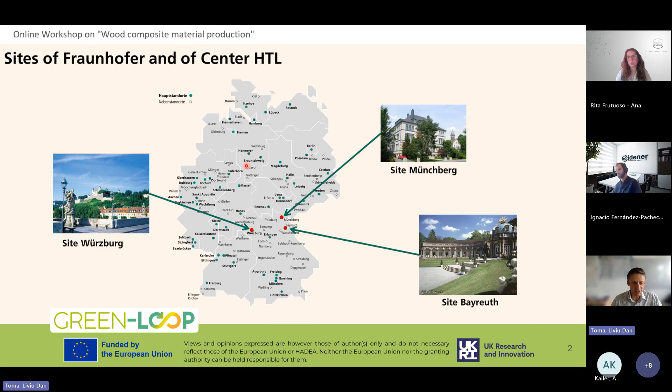Fraunhofer generally is spread all over Germany, and I'm quite sure Andreas will also have a slide about this, so I will go further, giving a little more detail about ourselves here in Bayreuth.

You can see here our main building, and on this side we have the fiber pilot plant, which also belongs to us. We have a technical area in Bayreuth that's around 3,200 square meters. Additionally, in Münchberg, 1,000 square meters, and in Würzburg a little less, so 500 square meters.

So our mission as Fraunhofer Center HTL is to design energy efficient heating processes and to contribute to the sustainable technological progress of society. We have a very big group working on developing high temperature materials, high temperature components, as well as high temperature measuring methods, all focused on optimizing thermal processes.

This is just a general remark for Fraunhofer, not only for us but also for Andreas: the primary goal of Fraunhofer is to implement new developments in industry.

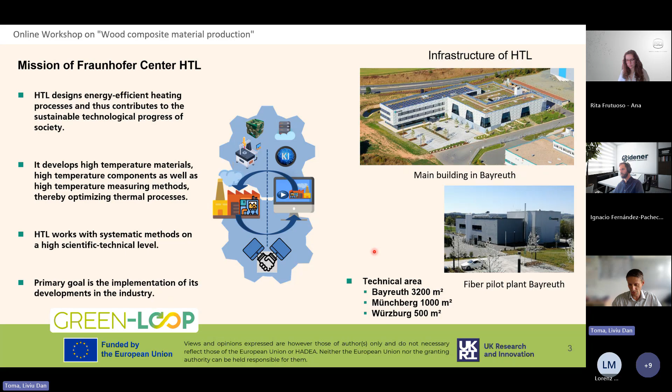Now coming back to our subject, today I will talk about results and how we got these results in the framework of the EU project Green Loop. The Green Loop consortium is built by many partners.

I know these slides will probably be made available afterward, so you can have a look at these sites and get more information.

What is basically Green Loop? In the Green Loop project, we follow three routes. One route is wood composite bearings for the tool and appliance sector, which I will talk about more in detail.

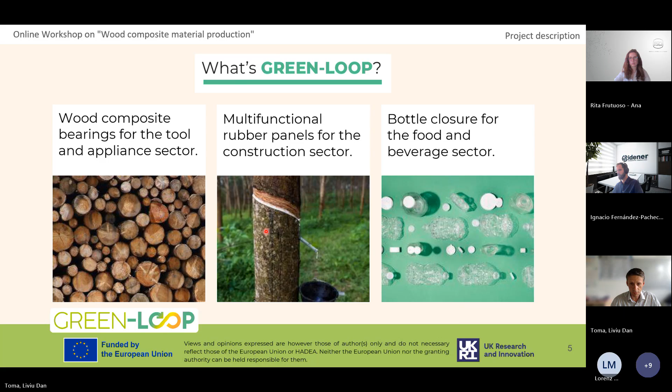The work in the project was divided into many work packages. We at Fraunhofer were mainly involved in work package 5, which is wood composites material production.

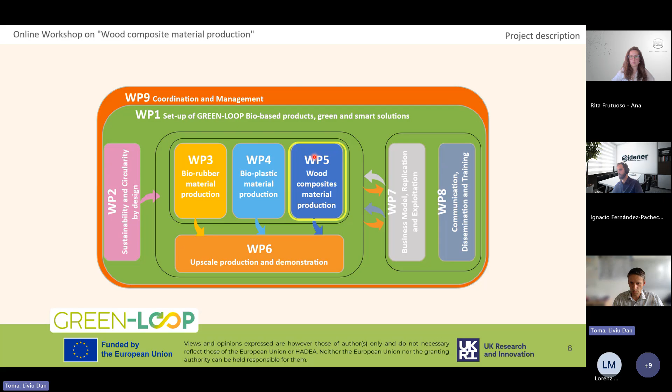How did it all start? It started almost 3 years ago when the kickoff meeting took place, and in that meeting we set some values for the composites which we wanted to produce and how we wanted to produce them.

So we decided that our raw materials should be bio-based, especially wood fibers or particles. We wanted to use biopolymers, and we also knew at that time that we would need fillers to add some special properties to the wood composites.

Also, an important part of the project was to follow the recyclability of the products, therefore also with the main aim to reduce maintenance cost, and also to use some of the inherent advantages of these biomaterials over conventional materials.

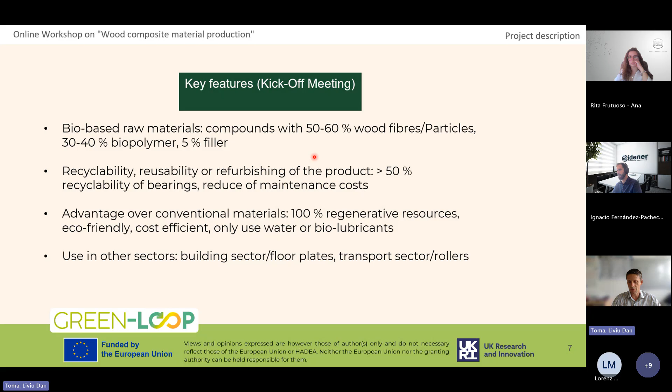Indeed, we concentrated on only some special sectors or industries, but we also see great potential for the composites to be used in other industrial sectors, like the building sector, floor plates, transport sector with rollers, and so on.

So more detailed about this: we decided at that time that we would concentrate on wood composite bearings to be applied in the tool industry, like injection molded units.

So we wanted to produce samples such as rings, cylinders, and half shells. Our partner Guala, at that time the name was Labrenta, provided us with prototype features and design.

The aim for the end of the project was to produce such wood composite in a small series. This is a very new thing for such wood composites because this should be used as a precision engineered mechanical component, which till now is still not really something available on the market. So that's about the beginning and how we started.

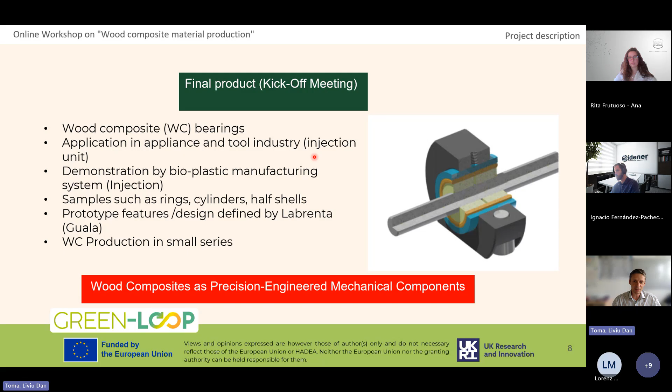A few words about the history of wood composites. Some may know, some may not, but these composites are quite old. They were used even back in ancient Egypt for making ships. But they emerged in the 20th century as cost-effective alternatives for wood materials, like particle boards or MDF.

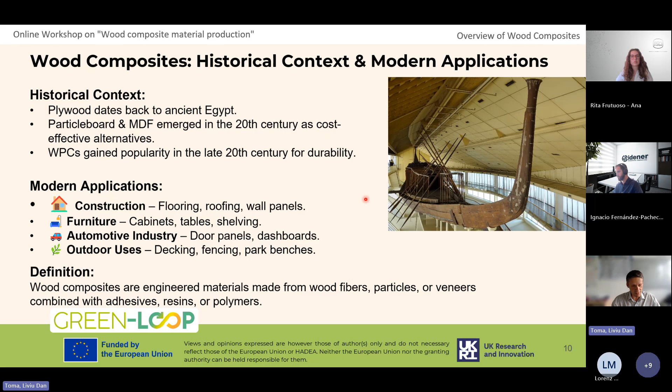Of course, we can use these wood composites to replace some other technical materials, but we have to agree that it's not always possible to replace solid wood, plastic, or metals with a wood composite. Nevertheless, the area of using it is quite large.

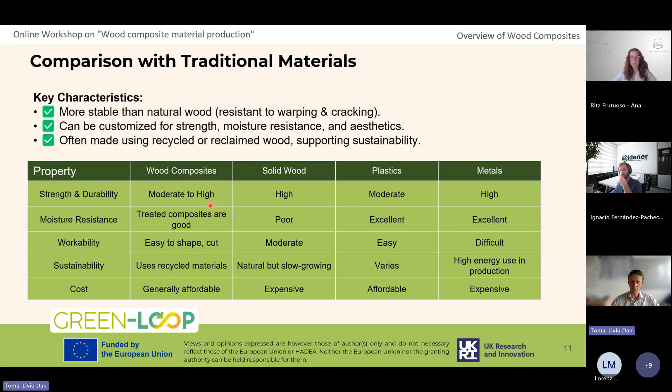Knowing all this about wood composites, we had to come up with a solution for making our wood composite bearings. For this we had to define a recipe for the wood composites. The key components of wood composites are, as I said, wood fibers, binding agents, and additives.

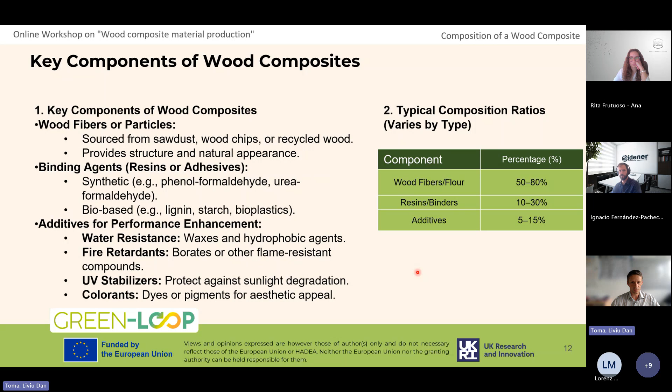And here in the table, more or less the percentage of how they should be mixed. So we went on the road to look for the best components to use, and we started with looking for the wood fibers or flours, which should come from renewable resources, like from managed forests and fast-growing species. And of course, if they come from this, they should also be biodegradable.

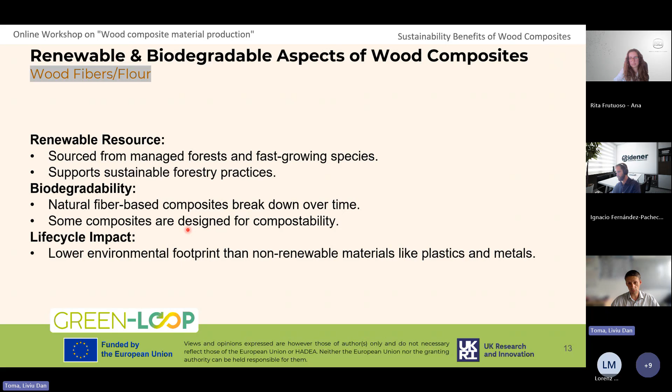We were also looking at the life cycle impact, and for this we found a very good partner for us, which did supply us with a lot of wood fibers and flours, and that is the firm JRS here in Germany.

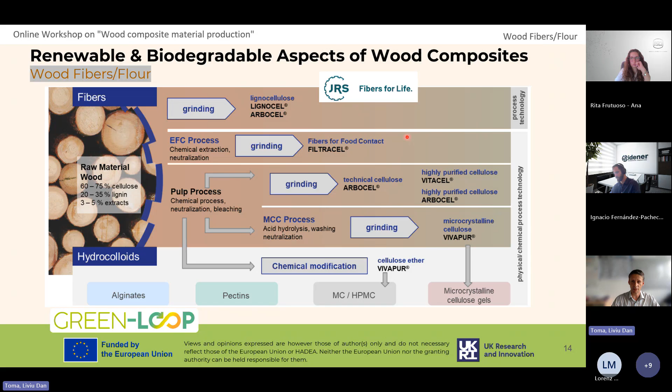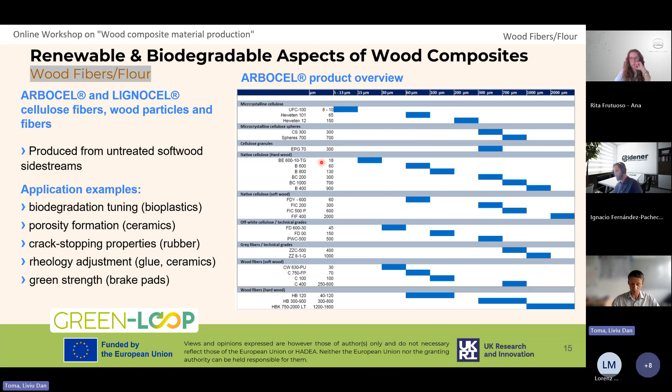This is just an overview of products which are supplied by JRS, and regarding especially the fibers, cellulose fiber or wood particles and fibers, we had quite a long list of options here. So from this list, we indeed tried some of the options in the composites.

Just as an example, two SEM pictures of composites which were made with ARBOCEL cellulose fibers and wood fibers, and you can see very clearly the difference in size and morphology here in these gray areas. This is the cellulose fiber with a small size, and on the right side you have the big wood fibers where you can even see the structure of the wood cells inside the composite.

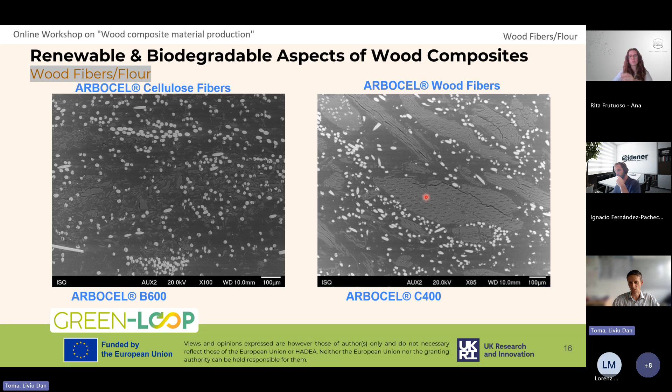Furthermore, we had to decide about the resin we would use for making the wood composite. The choice was very big, and we looked basically for bio-based polymers. It's also very difficult to find the special polymer we are looking for, mainly because there's a lot of variety, and also the biopolymers are categorized in different categories.

There are three major categories of bioplastic. One is biosourced, which is obtained from renewable resources and biodegradable materials. A second category is materials made using fossil fuels, oil, and biodegradable resources. And third, biosourced and sustainable materials that are non-biodegradable.

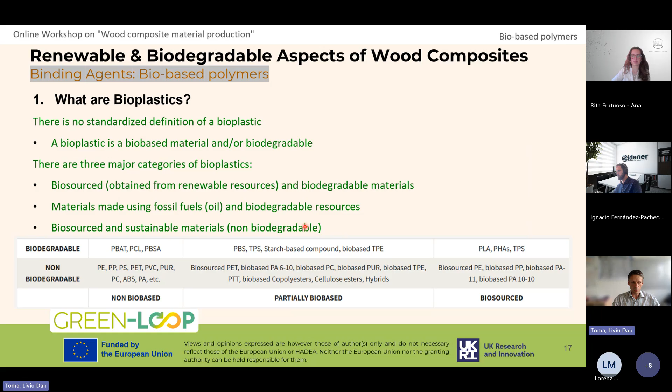Not only the materials from which the biopolymers are made is important, but also the chemical structure is important. So here in this table is just a list of the classical polymers and biopolymers which can be used for such wood composites.

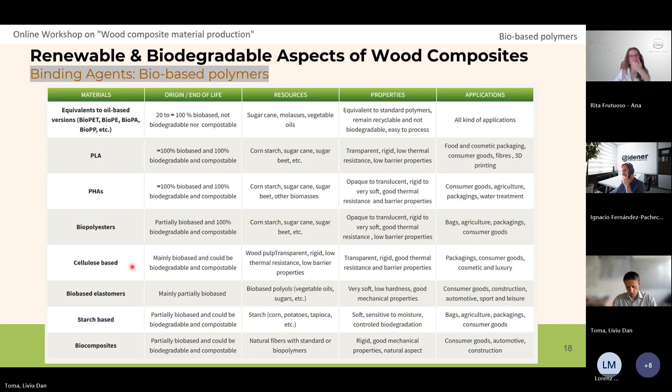For combining the wood composites and the wood fibers, a third category also comes into play: additives or fillers. This can be plasticizers, which is an additive to improve the dispersion of filler material in the matrix and prevent aggregation of filler material together. This also has an influence on the ductility of the material.

Some of the plasticizers usually used, which are shown in the literature, are polyethylene glycol, glycerol, or tributyl citrate. There are many important factors to take into account, like the proportion, how you disperse, and also the fiber surface treatment is important. Here we can have two types of surface treatment: physical treatment and chemical treatment.

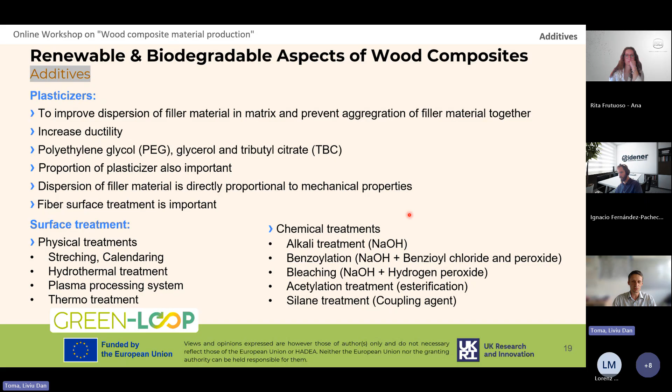As you can see, it's not trivial to make such wood composites. Therefore, we decided to make our life a little bit easier and use an already available biocomposite on the market, and further improve this biocomposite by adding fillers and additives. So at the beginning of the project, we started with some biocomposites supplied by Stora Enso.

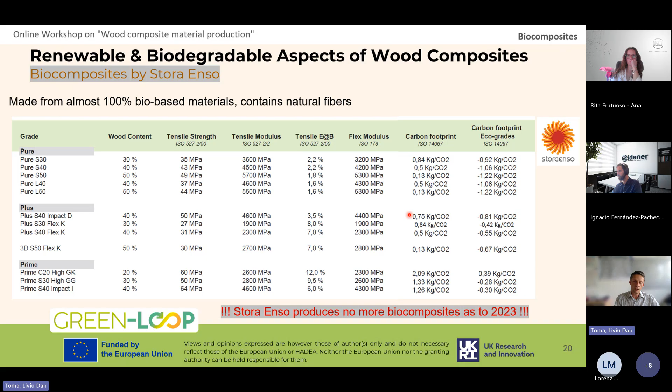These gave quite good results. But on the way, we found out that Stora Enso was not anymore producing these biocomposites, so we had to look for alternatives. One of these alternatives we found in the form of ARBOBLEND products, which were supplied by Tecnaro.

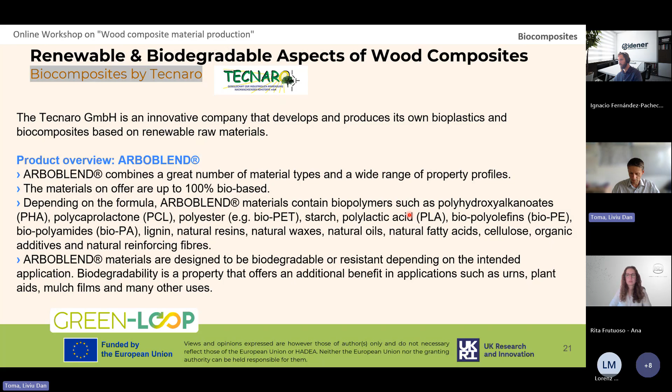This is a material which is up to 100% bio-based and contains biopolymers like PHA, PCL, PET, PLA, and so on, and also already includes in the formulation lignin, natural resins, and so on. With this, we continued our work.

We prepared three batches of materials, based first on Stora Enso and later on the Tecnaro biocomposites. We added wood fibers from JRS and fillers and additives like recycled glass fibers, supplied by the firm STW here in Germany, or lignin from Lignostar.

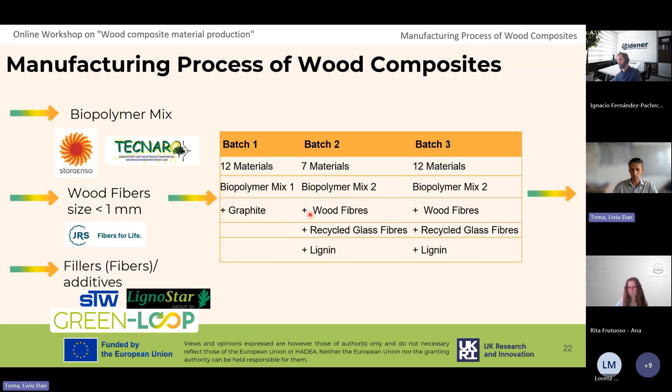So this is an overview of the wood composite mixtures and how we prepared them. Basically, we chose to compound the mixtures in an Eirich mixer. Then we performed the extrusion using a classical extrusion unit where the barrel is electrically heated, or using microwave-supported heating.

I'll say a few more words about this in the next slides. The mixtures obtained through the extrusion process were cut, and then with press molding we got test samples in the form of plates, which were further characterized and machined into special samples.

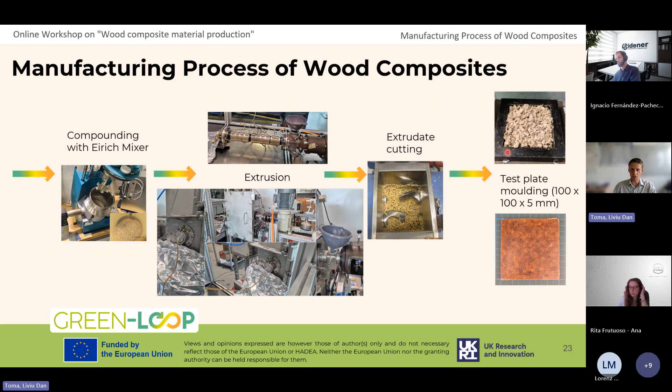For the typological characterization, as I said, a big part of the work was done with our colleagues in Idener to integrate a microwave heating system into the extrusion unit. Here is an overview of the unit. You have here the microwave cavity.

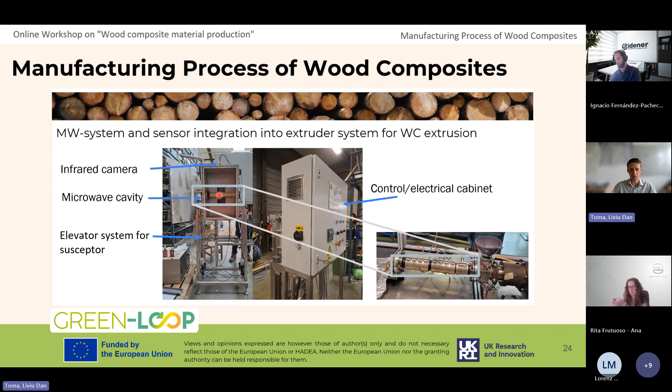We have an infrared camera to oversee the heating process. We have the control, or electrical cabinet, and here inside is the barrel for the extrusion. On this side, you can see the barrel with the electrical heating, and as in the picture, you can notice that it's not the same.

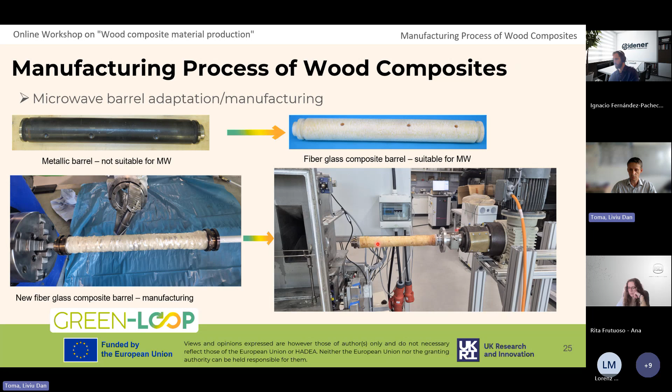This is true: the metallic barrel, which is used in normal extrusion, is not suitable for the microwave. So for that, we had to develop a new type of barrel made of fiberglass composite. Here in the picture is the first version, and along the way in the project we decided to improve this design. Here is the new fiberglass composite barrel during manufacturing using filament winding. And on the right side, you can see the new barrel attached to the extrusion unit, but still outside the microwave cavity.

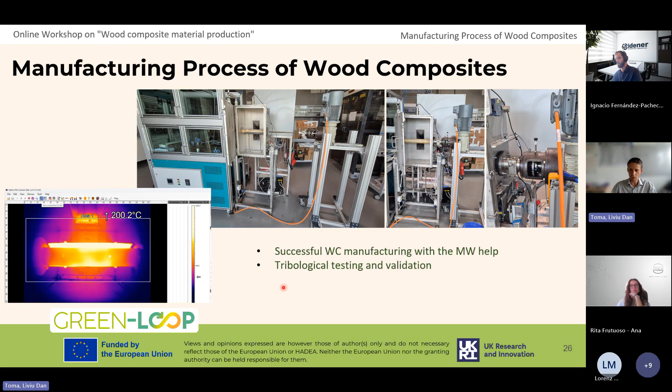I think Andreas will show more pictures about these materials. Nevertheless, we were very diligent, and we also took a lot of time to check the energy consumption.

For this, we had help from our partners in the consortium, IRIS, which provided us with special units to check the energy consumption, and the preliminary results show us unfortunately not such a big energy saving comparing conventional heating extrusion and the microwave heating we're using in our prototype.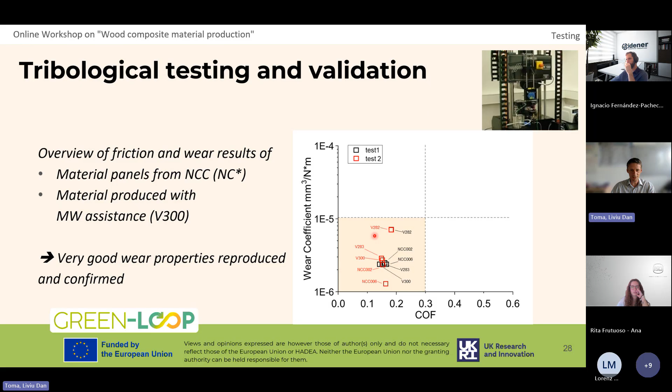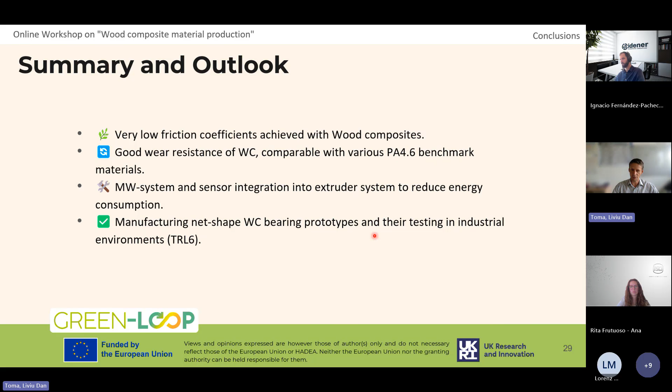So just a short summary and outlook. Very low friction coefficients were achieved with the wood composites. We had good wear resistance, and we integrated the microwave system and sensoric into the extruder system to reduce energy consumption, and we were able to produce near net shape wood composite bearing prototypes, which are currently on the way to being tested in industrial environments. For this, thank you for your attention.

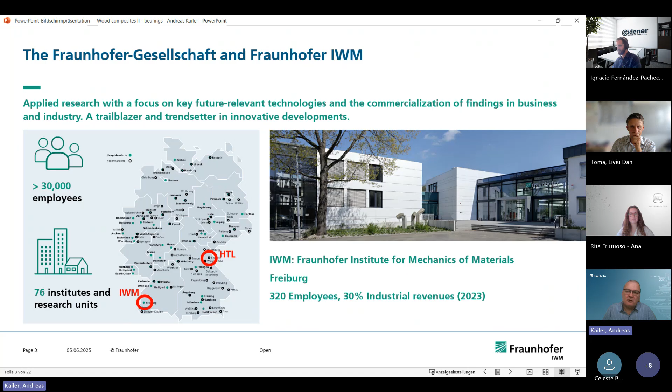So this is an important figure for us that indicates how well we are working in terms of transfer of scientific results, fundamental results, into industrial applications. Our institute has core topics of safety, reliability, durability, and functionality of materials in different applications, and we have a very large range of experimental or simulation methods for how we characterize and analyze materials in terms of functional behavior in different applications. One large department of this institute is the tribology department, where we study friction and wear behavior of materials and components.

I'm responsible for the group tribological component testing and system analysis, and so we did some quite experimental work within the EU project.

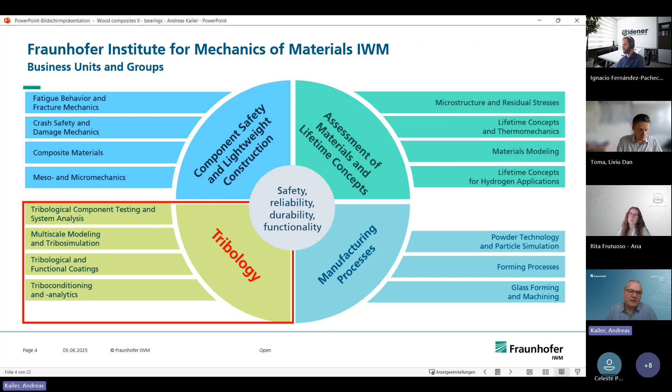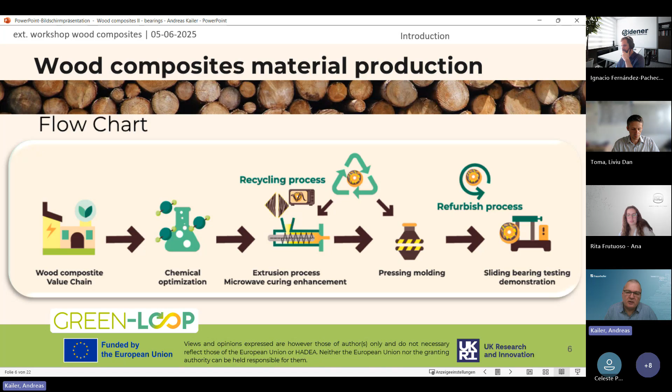I have also to mention that we have collaborated with Green Loop partners in this project consortium in this work field for the wood composite materials. We have had a very good collaboration with IDENER, which is also the overall project coordinator, NCC the National Composite Center in Bristol, University of Bristol, ISQ in Portugal, Koala Closures, and Iris Technology and Solutions. I have no time to describe all the work they contributed, but I'm thankful for this good collaboration, which is still going on.

So to the friction and wear aspects, we had at first to define requirements for tribological applications. And here we referred strongly to thermoplastic composites that are broadly in use in such kind of applications. So you can think of POM, polyoxymethylene, or polyamide, or PEEK, polyether ether ketone, or polyimide, and other materials which have a broad range of thermal stabilities. With our materials and our matrix, so this bio composite, I think we could meet medium requirements for tribological applications, not the high temperature or advanced requirements. But as you can see, we have defined here a compressive strength of 70 megapascals.

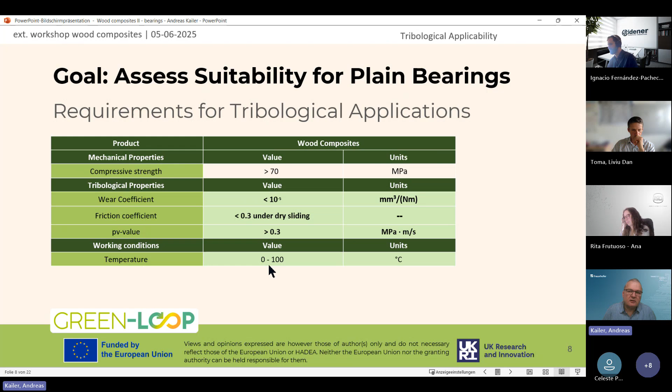So they should work within this PV value range up to 0.3 megapascals times meter per second. And temperature stability until up to 100 degrees Celsius. So these were the data we defined, the requirements.

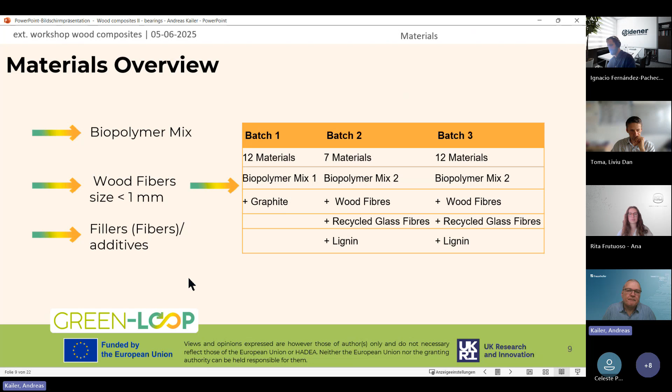We have produced in the project more than 30 different material types in different batches, also all of them somehow different in the mixtures of biopolymer, wood fibers, and also glass fibers, and lignin and other additives we have used. And we have produced finally very good material qualities.

Liviu also talked about this microwave enhanced processing, and finally with this processing also we got a good material homogeneity and very good mechanical properties, and finally also good friction wear properties, as you will see.

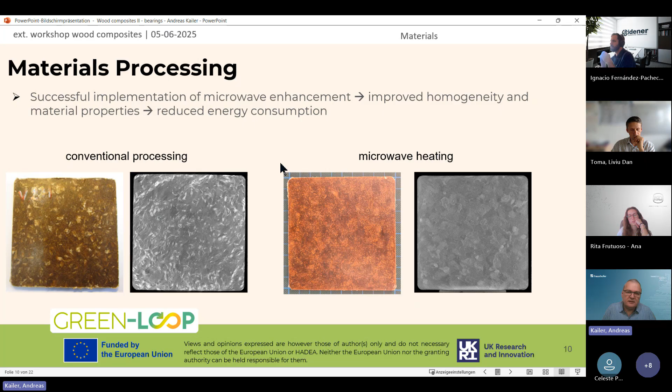The properties here, mechanical properties, in short: we have had hardness values larger than 50 Shore hardness, density 1.2 grams per cubic centimeter, compressive strengths between 60 and 82 megapascals, and thermal stability up to 120 degrees Celsius. So very good properties.

Not so good was, as expected, tensile strength of a bit lower than 10 megapascals, which is no problem for tribology, for our application in tribology. And the tensile strain is also rather small here at this point.

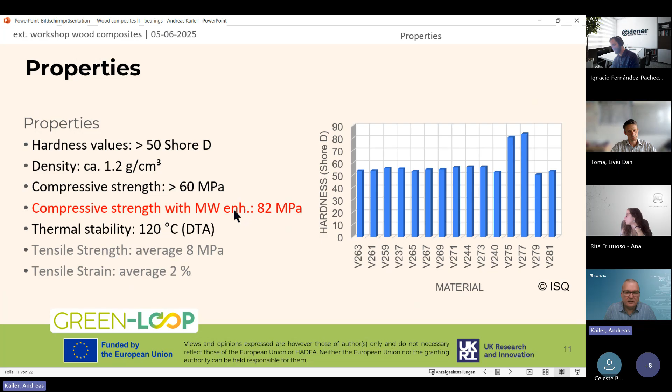What we did for tribological evaluation is shown here as a testing method. We used at first a pin-on-disc geometry. We used wood composites as pins, and we purchased rings from bearing manufacturers. This was the opportunity to buy with a rather small budget a large number of such rings, and so we were very efficient and could conduct a large number of tests with this type of test.

With this type of method, we have used a normal force of 85 newtons, which corresponds to 3 megapascals, at a sliding velocity of 0.1, which makes this PV value of 0.3. The test duration was normally 6 hours, and we made mostly dry tests without lubricants, which gave the most interesting results.

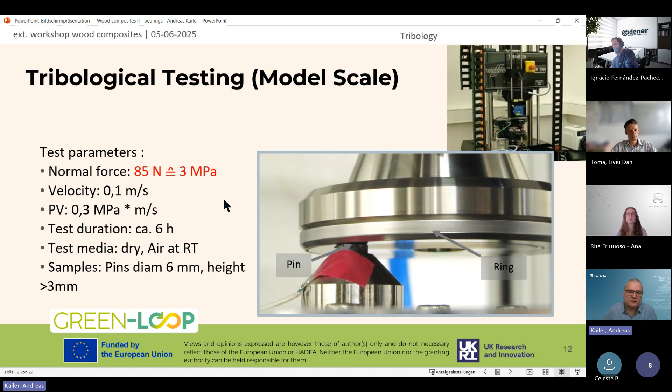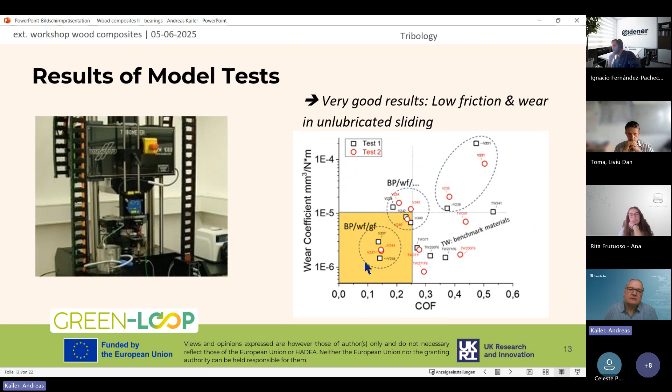So very good for two material types in this first batch. And here we have reproduced these tests with a number of trials where we varied slightly the compositions of the materials, always with a biopolymer and different amounts of wood fibers and also different amounts of glass fibers, and in most cases ended up in this very favorable field of very low friction and low wear. So this is very successful. We have good wear properties and confirmed the low friction values for these selected material compositions.

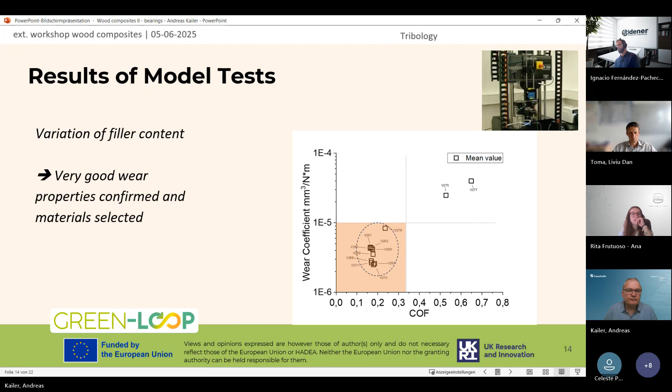In the next step, we produced these kinds of bearings. So we have a steel shaft material of steel. This is rotating, and we have a radial force between the steel shaft and the wood composite bearings. I think we use about 50 newtons, we will see in a moment. The rotational speeds can be increased to around 3,000 rotations per minute.

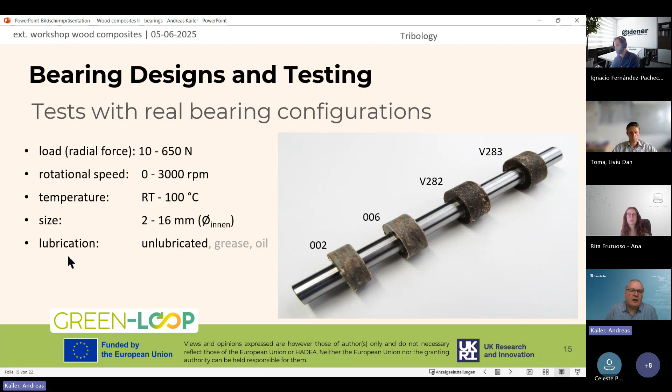The black and gray curves are the friction coefficients. They started at 0.2 and continuously increased to values above 0.4. At some point we got catastrophic failure because the friction was so high that the thermal temperature increase was too high for the material, so it melted down, and the test stopped already before the next speed level was reached.

On the right side, you can see the wood composite, where we also see in black a friction coefficient which started a bit higher but quickly was reduced to around 0.25 to 0.3, which is not as low as in the pin-on-disc test, but really, really good. The rotational speed was increased stepwise to 900 rotations per minute, and the material was stable while friction was slightly increased in these different speed ramps.

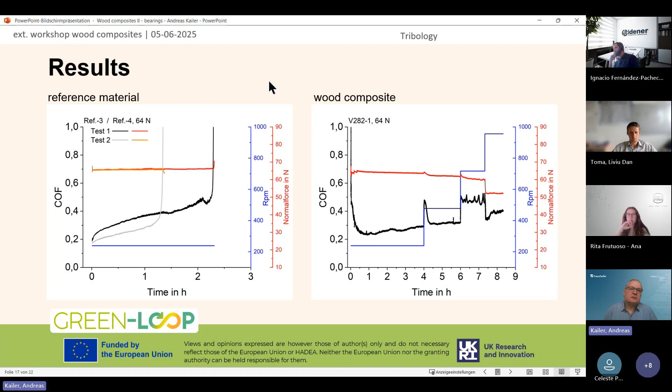So very good friction and wear behavior also in this bearing test. Just one result for the surface analysis after the test.

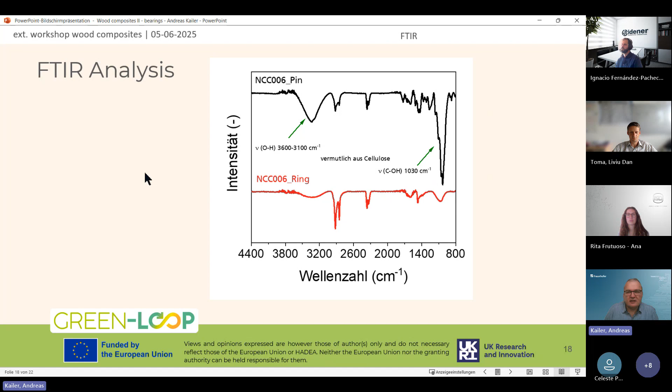So there has been a slight material transfer from the wood composite onto the steel surface, on a small or slight scale, and this enables the low friction, as we propose at this moment.

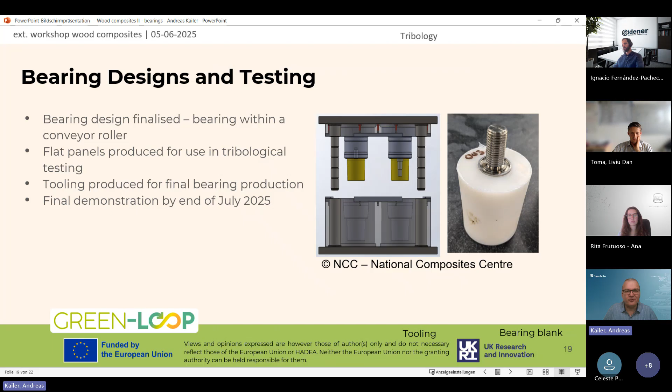Of course, the work is not done at the moment. We are still going on, and we are preparing component tests for conveyor rolls. Here we have support also from NCC to produce these parts, and these tests will soon be started. We have time until the end of the project in September this year to finish this production and the final testing as conveyor rolls. So we are looking forward to final tests and evaluations here.

To shortly conclude: we set specifications that served as a guideline for the materials development for tribological applications. We have had very promising results, so the mechanical properties were suitable. We have seen very low friction coefficient without the use of liquid lubricants, and acceptably low wear rates. All important material specifications and requirements have been fulfilled, and we are now looking forward to final evaluation of these materials in conveyor roll tests.

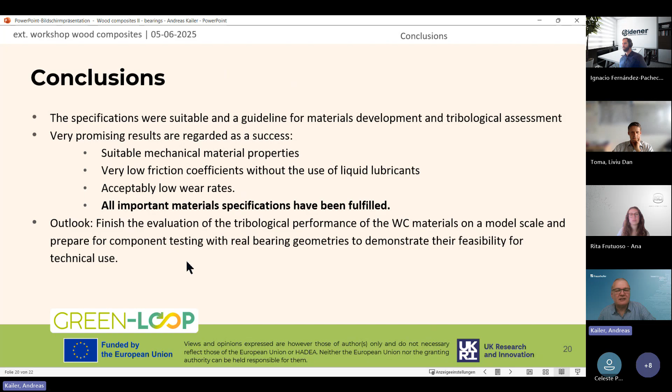I have still a small evaluation, but I think it's not the time for this. We already have 3 o'clock, so I will close now. Thank you for your attention, and we look forward to questions.

Thank you, Andreas. Thank you for also keeping with the schedule. I guess we can have some time for questions.